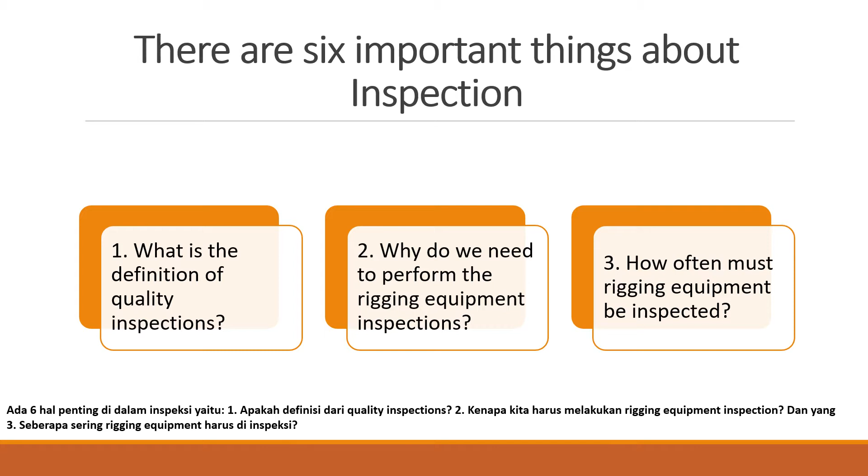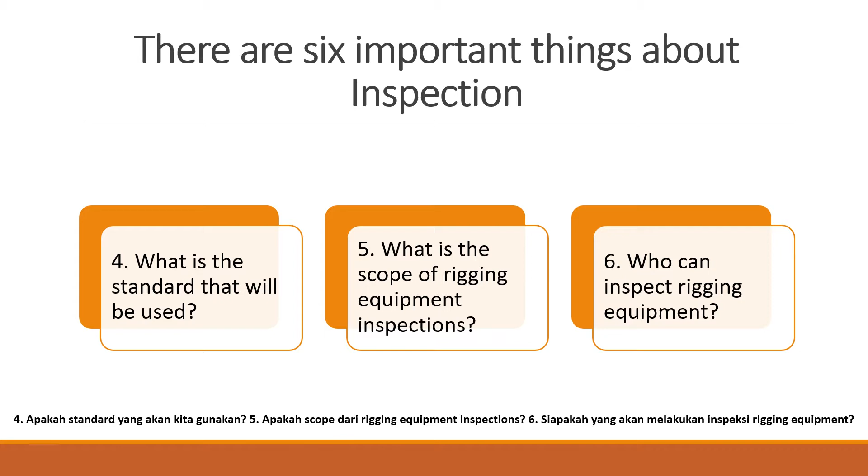Okay, without any further ado, let's start with our topic. There are 6 important things about inspection. Number 1, what is the definition of quality inspection? Number 2, why do we need to perform the rigging equipment inspection? Number 3, how often must rigging equipment be inspected? Next, number 4, what is the standard that will be used? Number 5, what is the scope of rigging equipment inspection? And number 6, who can inspect rigging equipment?

Let's start with question number 1. What is the definition of quality inspection? A quality inspection involves measuring, examining, testing, or gauging various characteristics of an equipment and comparing those results with specified requirements to determine whether there is conformity, to ensure integrity of equipment.

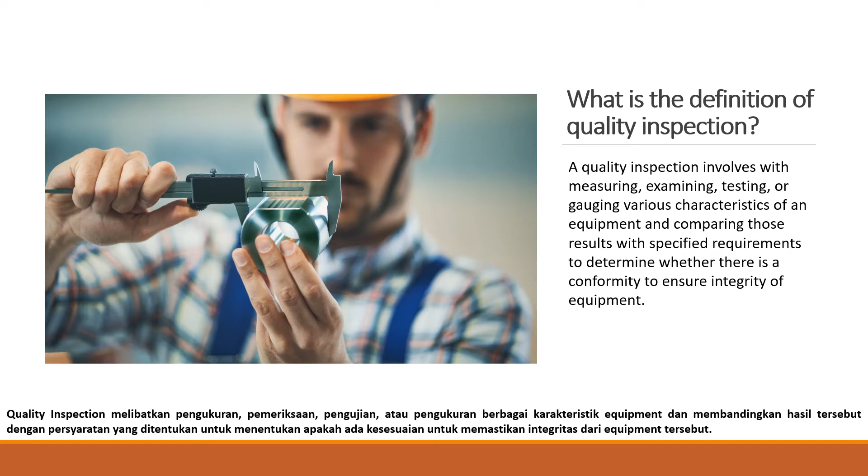Question number 2. Why do we need to perform the rigging equipment inspection? Well, we need to perform the rigging equipment inspection for quality control. Make sure your rigging equipment is up to OSHA and ASME standards. It's extremely important not only for keeping your workers safe, but also to make sure everything is in order if OSHA does come knocking on your door one day.

Another question is, how often must rigging equipment be inspected? OSHA and ASME have a variety of standards that relate to the inspection and removal from service criteria for different types of rigging product. Number 1, initial inspection, or prior to initial use. The best practice is to perform a visual inspection of all rigging equipment upon receiving it from the supplier. For hardware, hooks and slings, double-check the tagging or markings on the product to make sure that it is what you ordered and that the rated capacity meets all your project specifications and lifting requirements.

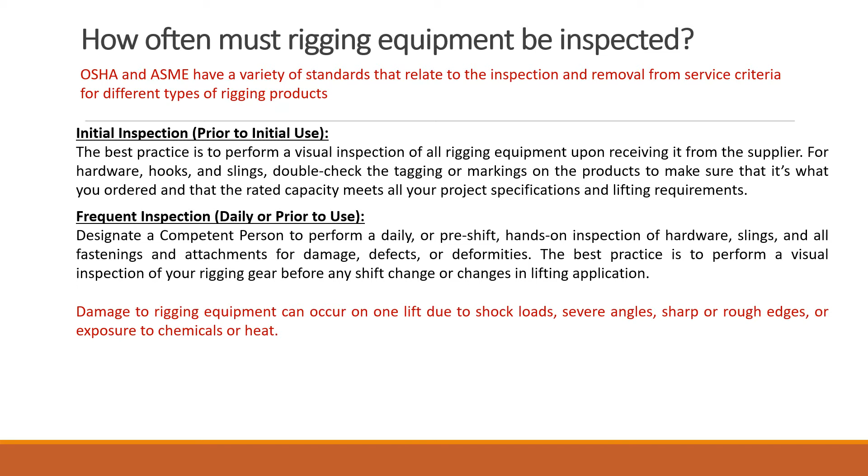Number 2, frequent inspection, or daily or prior to use. Designate a competent person to perform a daily or pre-shift hands-on inspection of hardware, slings, and all fastenings and attachments for damage, defects, or deformities. The best practice is to perform a visual inspection of your rigging gear before any shift change or change in lifting application. Damage to rigging equipment can occur on one lift due to shock loads, severe angles, sharp or rough edges, or exposure to chemicals or heat.

And last is periodic inspection, minimum every 12 months. You should be aware that OSHA and ASME require a documented periodic inspection of your lifting and rigging equipment every 12 months at a minimum, and monthly to quarterly inspection in more severe service conditions based on the following criteria: frequency of use, severity of service conditions, nature of lifts or load handling activities, and experience gained on the service life of equipment used in similar circumstances.

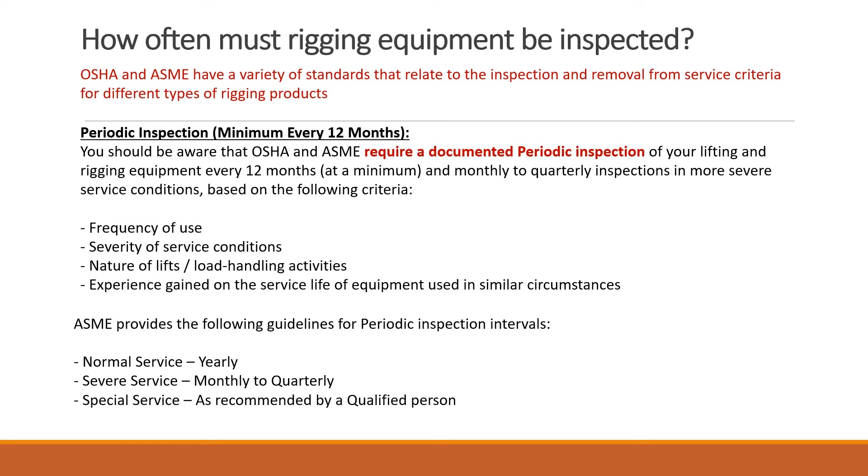ASME provides the following guidelines for periodic inspection intervals: normal service, yearly; severe service, monthly to quarterly; and special service, as recommended by a qualified person. Well, depending on the severity of the operating environment and frequency of use, your business may decide that more thorough or more frequent periodic inspection should occur. If your rigging gear is in constant use or used in a severe service environment, you may not be compliant with only one periodic inspection each year.

Make sure that a competent person has reviewed your lifting and rigging program and can make a recommendation on how often a periodic inspection should be performed within a 12-month period. Examination should be carried out every 6 months for lifting equipment which carries people, as it poses the highest safety risk. Lifting accessories should also be inspected every half a year, as they can be fatal if damaged. Other types of standard lifting equipment can be inspected yearly if necessary.

Some periodic inspections, like the inspection of slings, are required to be documented, and you are required to maintain a record of the most recent periodic inspection. Failure to maintain and retain inspection records is one of the most common issues we see that can prevent a company from reaching full OSHA or ASME compliance.

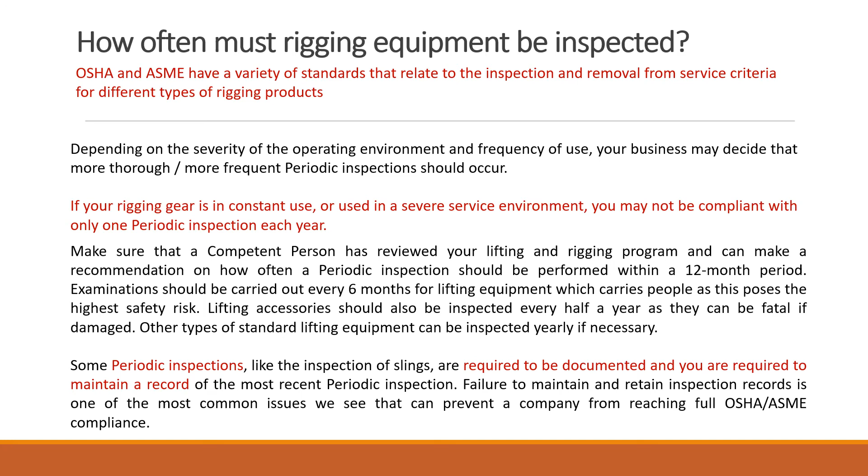What is the standard that will be used? Rigging equipment inspection standards are according to ASME B30 series, OSHA 1926.251 Rigging Equipment for Material Handling, API RP 2D offshore cranes, API Spec 2C offshore cranes, and British Standard 7121 Code of Practice for Safe Use of Cranes. For a detailed explanation about rigging equipment inspection standards, I will post it in the description and also on my LinkedIn.

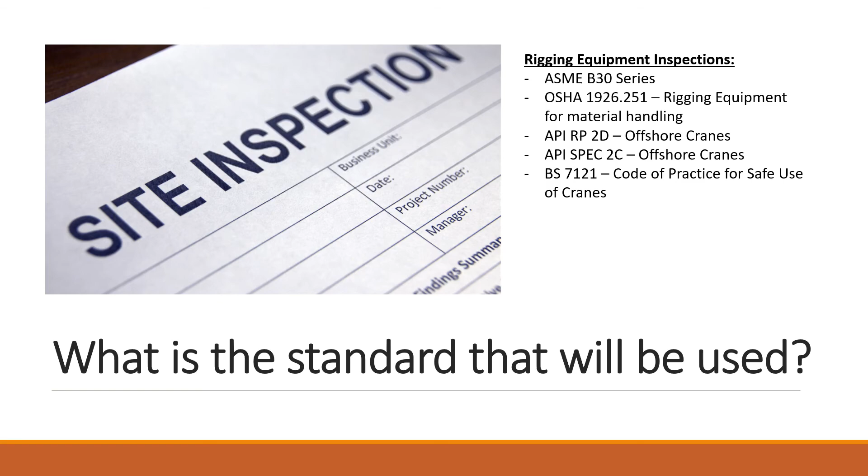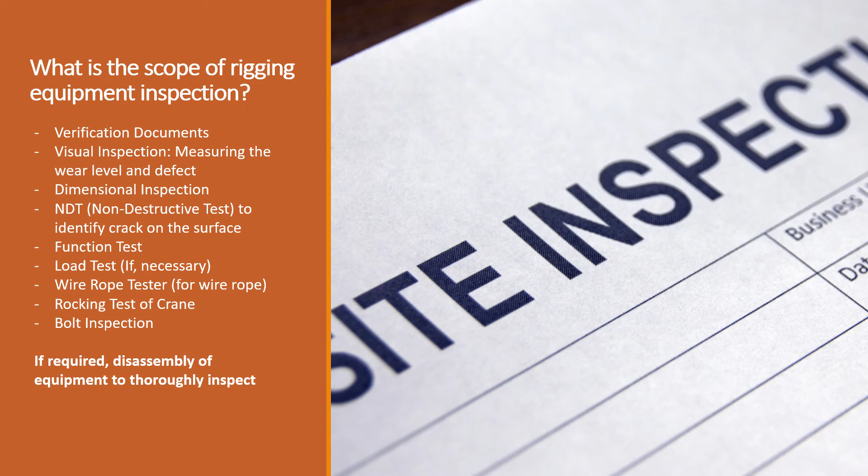Another question is, what is the scope of rigging equipment inspection? Number 1, document verification. Number 2, visual inspection for measuring the wear level and defects of equipment. Number 3, dimensional inspection. Number 4, non-destructive test to identify cracks on the surface of equipment. Number 5, function test. Number 6, load test if necessary. Number 7, wire rope tester for wire rope. Number 8, rocking test of cranes. And number 9, bolting inspection. If required, disassembly of equipment to thoroughly inspect.

And the last question is, who can inspect rigging equipment? A visual inspection shall be performed by the user or designated person each day before the rigging hardware is used. And a periodic inspection shall be performed by a competent person with a valid certificate. A competent person is someone who has the right experience and knowledge to thoroughly understand what they are looking for. They should be able to spot any sign of weakness or damage that could be a potential hazard. This could be a member of your team with relevant knowledge or could be someone from another organization.

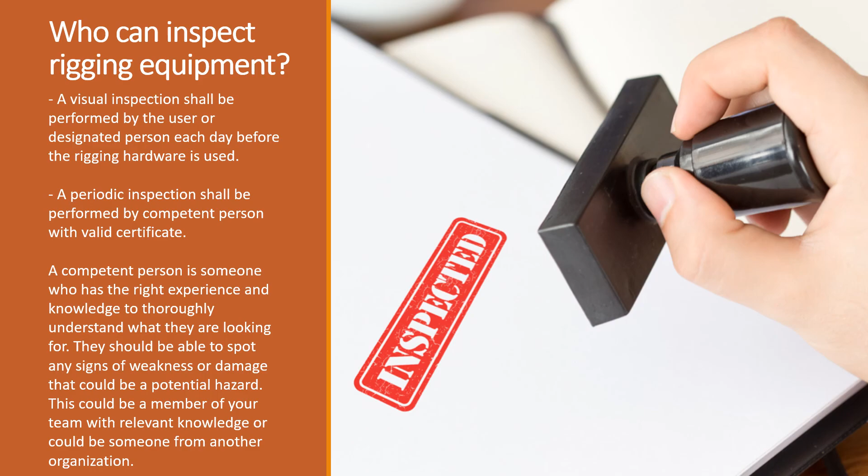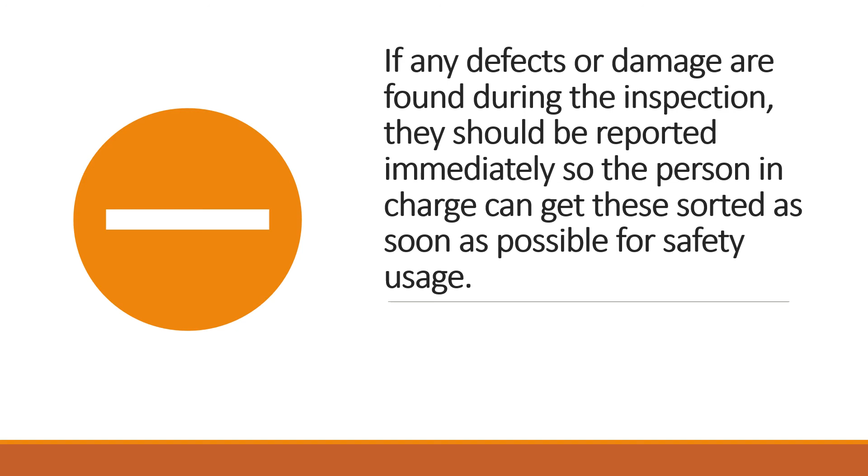Remember, if any defects or damage are found during the inspection, they should be reported immediately, so the person in charge can get this sorted as soon as possible for safe use. Hopefully, this information is useful for all of you.